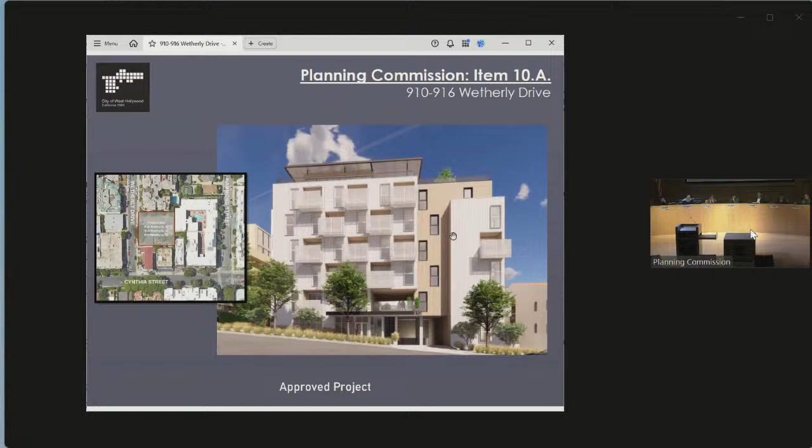Because this is 100% affordable housing, it is eligible for significant incentives and concessions in accordance with state density bonus laws and the West Hollywood Municipal Code. The original approval granted a density bonus allowing an additional 72 units and an additional 3 stories, or 33 feet in additional height, and a waiver of parking requirements. Although no parking is required, the applicant has provided 62 parking spaces on site. These incentives were previously approved and are not subject to this amendment or appeal.

As part of the original entitlement, the project was granted 4 concessions under the state density bonus law: one, elimination of the additional 6-foot setback for upper stories beyond the front yard; two, a reduction in common and private open space; three, flexibility in the location of common open space; and four, allowing non-residential parking for the adjacent church. Like the density bonus incentives, these concessions were previously approved and are not subject to this amendment or appeal.

The project was also approved with 3 modifications: two modifications for a 10%, or 1-foot, reduction to each side yard setback, and a 10%, or 1 foot 6 inches, reduction to the rear yard setback. These modification requirements live in Chapter 19.60 of the West Hollywood Municipal Code, where parameters are set on what constitutes a variance versus a modification. A modification is an adjustment of no more than 10% to the standards of the zoning code. Anything exceeding that 10% limitation requires a variance application.

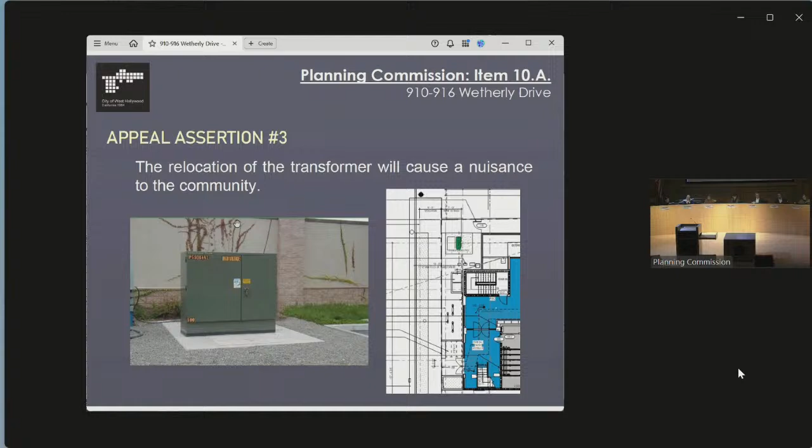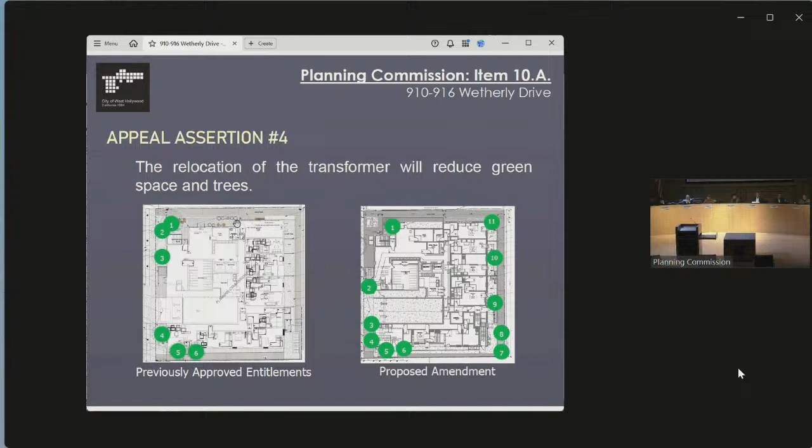The fifth appeal assertion claims that the removal of the green roof reduces environmental benefits and design quality. To clarify, the original project did not include a green roof that was publicly accessible or a landscape amenity space. The green roof was one of 3 options from the green building standards outlined in the West Hollywood Municipal Code. These options are a green roof, renewable energy systems, or solar thermal systems. The updated design will meet the city's green building requirements as conditioned in the original approval. If the applicant chooses not to pursue any of these 3 required options, the project will be required to return to the Planning Commission for further review.

The sixth appeal assertion raises concerns about the revised balcony design, claiming it reduces design quality. The amendment includes a net reduction from 47 to 45 balconies, along with adjustments to improve privacy and satisfy California Building Code requirements. Many balconies on the north and south sides were shifted or reduced, while others were relocated to the east and west, where greater setbacks offer more separation from the neighboring properties.

These changes were reviewed by the city urban designer, who confirmed that the architectural character, massing, and materials remain consistent with the approved design. The project continues to meet objective standards for private open space under the zoning code, and under the Housing Accountability Act, the city cannot deny or condition the project based on subjective aesthetic preferences when those objective standards are met. So in summary, the revised balcony layout improves functionality, maintains the approved design integrity, and remains fully code compliant.

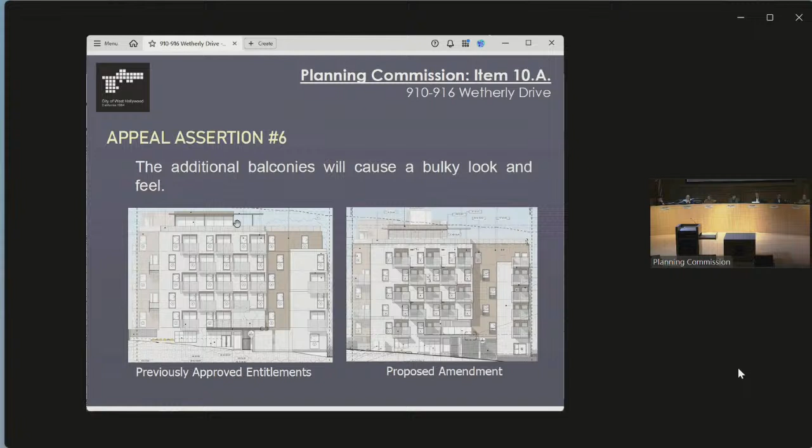The seventh appeal assertion objects to the removal of a 423 square foot fitness room. However, there is no requirement under the West Hollywood Municipal Code that mandates specific amenities like a fitness room. As a Housing Accountability Act project, the applicant has discretion over amenities allocation as long as the project meets all objective zoning and open space standards, which it does.

The fitness room was removed and replaced with a unit from the second floor to preserve all residential units and increase usable courtyard open space. Other amenities, including a community room, rooftop areas, and a dog run, remain available to the residents.

The eighth appeal assertion claims that the transformer location violates the city's seismic setback requirements. While this site is located in the Fault Precaution Zone 1, the 50-foot setback only applies to habitable structures, not equipment like a transformer. The transformer is compact, non-habitable, and will be installed on a concrete pad that complies with all seismic safety standards. Southern California Edison reviewed and approved the placement, confirming it meets safety and accessibility requirements. The location is necessary for utility access, and there's no violation of the city's seismic regulation.

Also, I wanted to confirm that the red line indicated in this photo here is not the fault line. However, it is a setback line indicating a distance of 50 feet away from the actual fault line.

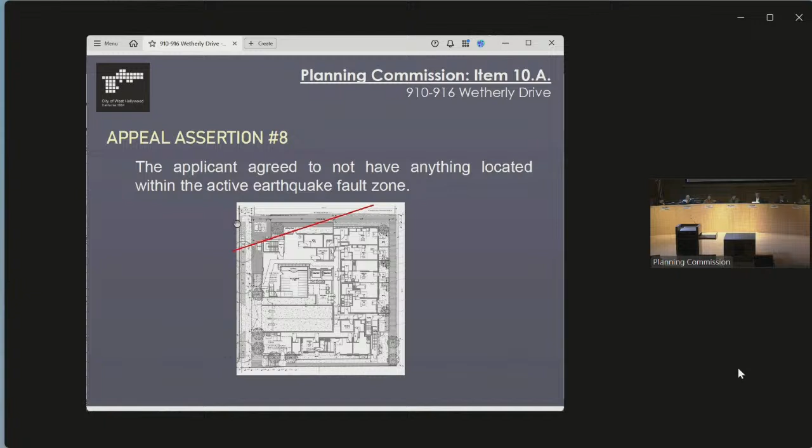The final appeal assertion questions the Planning Commission's consent calendar process at the February 2025 meeting. That process was conducted in accordance with standard procedures. The commission was informed on record that if there was any factual or objective questions, the item could be moved to the excluded consent calendar. Staff also clearly stated at the time that if the project were appealed, it would return to the commission as a notice public hearing, which is exactly what is happening now.

The city attorney and the planning commission staff ensured that all procedural requirements were followed and no irregularities were identified that would affect the validity of the approval. The hearing has been properly noticed and all interested parties have had the opportunity to participate. The appeal process has been fully honored and executed in accordance with the law.

So as a 100% affordable housing project, this development is subject to the Housing Accountability Act, or HAA. The HAA requires that cities give the fullest possible weight to the approval and provision of housing, especially for lower income households. The city of West Hollywood has a RHNA goal of 3,933 new units by 2029, and projects like this are critical to meeting that obligation.

Under state law, when a housing project complies with objective general plan and zoning standards, a local agency cannot deny it, reduce its density, or impose conditions unless it makes specific written findings, supported by substantial evidence, that the project would result in a significant, quantifiable, and unavoidable public health or safety impact, with no feasible way to mitigate that impact. In this case, the appellant did not assert that the project is ineligible under the HAA, nor did they identify any objective standards that the project fails to meet. As a result, the Planning Commission's discretion is limited, and the project must continue to be evaluated through the lens of the HAA protections.

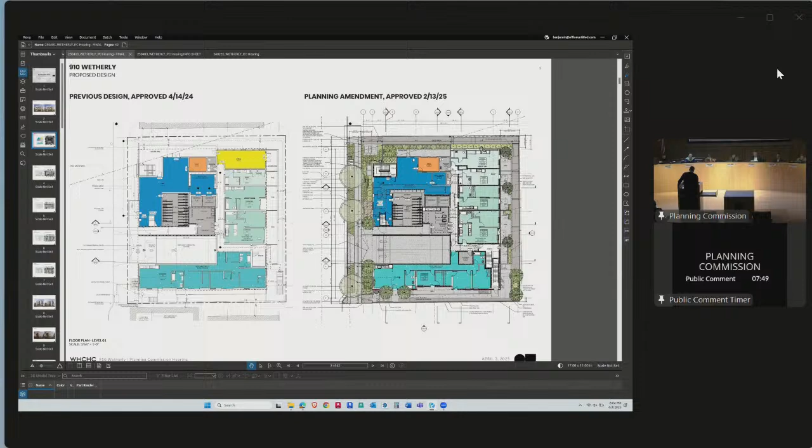From an elevation standpoint, you just saw the rendering of this. Again, largely untouched in terms of the main portion of the facade, with the addition of more balconies, but the same balcony condition, same design, same materiality and treatment.

The transformer is shown right here.

On the south side, this is one of the places where, to be clear, the building size in terms of gross square footage did increase, largely because where we could, we moved the depth of that balcony wall towards the plane of the image, or further south. So this becomes more of a Juliet balcony, which we felt, given the side yard setbacks versus the bigger front and rear setbacks, would benefit privacy, because you don't have somebody out on the balcony. The door is open, there is breeze, but you're not actually out there.

East side was an area where we took advantage of the opportunity to place a balcony almost completely outside of the exterior wall. It's still inset, so the language of where we treat balconies is preserved, but you're seeing addition of several balconies here that are deeper, larger, and more usable, again on the rear yard with a further setback. We felt that was more appropriate.

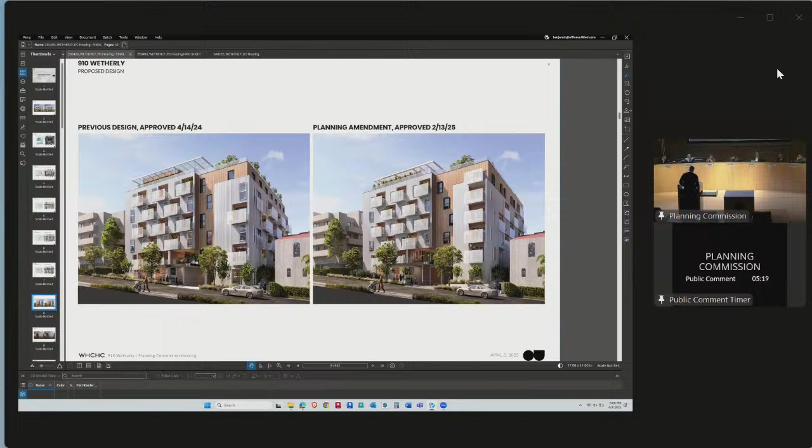We have some side-by-side views just showing what we believe to be very minor changes. You're seeing the shrinking of the balcony, so that becomes a Juliet condition, while these ones remain usable. Same thing here - the balconies in the diagrid formation remain in the deeper format, looking out over the street.

From above, we want to make a couple clarifications. The requirement for a green roof or alternate measures we will meet, and we are currently still including a green roof, as you can see here. That was never intended to be usable - it's in an area where you actually can't see it as a resident, but we still intend to provide it and meet the code requirement for size. Part of the reconfiguration was simply due to the amount of mechanical equipment we now have on the roof.

If I could just quickly address a couple things that came up: as staff mentioned, we are not aware of noise complaints about transformers, and we simply comply with Southern California Edison's standards for noise, vibration, and the footing that the transformer sits on.

The green space - there was actually no loss of common outdoor space. In fact, at the courtyard level, by moving one of the units, we are increasing the amount of usable outdoor space. Again, a trade-off to be considered with changing the gym use, but we felt more common outdoor space was a value.

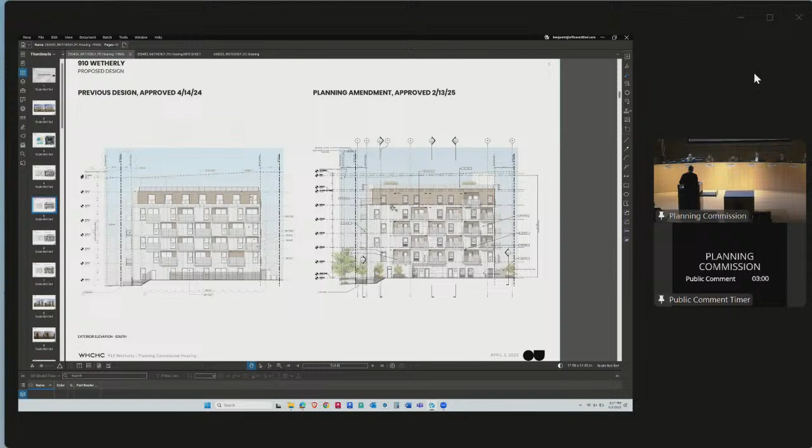That's largely a result of the input, coordination, and decision-making from ownership about mechanical systems that impacts the floor-to-floor heights or the usable floor-to-ceiling heights. This is a 100% affordable project, and the selection of MEP was made to service the most units possible. So we made some minor additions to the overall height, still within the zoning clearances and well within the 10% adjustment in terms of height. So if you're noticing a slight difference in terms of this to this, that's the result of it.

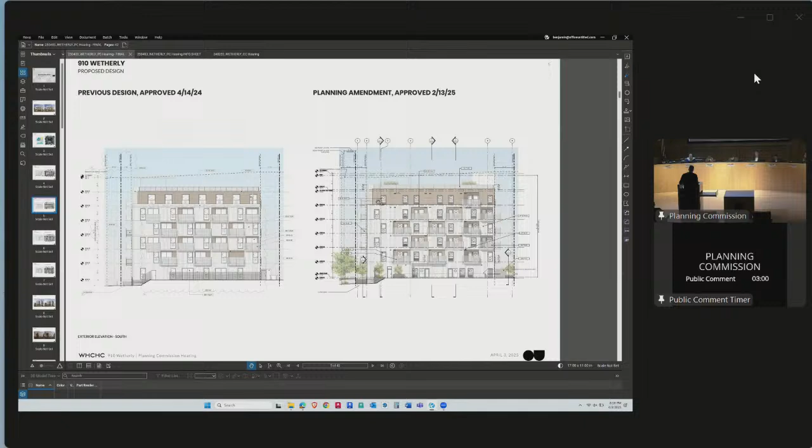And what is that height? How many feet of additional height? It's approximately 2 feet. Okay, thank you, let's move to the next one.

So now we are at the west elevation, correct? East. East, okay, sorry. So now we're looking at the stairwell? You have the stairwell on the left.

Correct. Can you explain, did the CBC change since this original design, so that stairwells didn't have to be enclosed before and now they do? The CBC did not change. To answer your question, this was more of a long-term operational concern. Initially, we wanted to preserve as many views as possible and, to the greatest extent, be a good neighbor in terms of where we are placing mass at the top. The entire top floor of this building has been set back wherever possible. We are providing significant outdoor common amenities, but in this case, this was a long-term durability, operational, and safety decision.

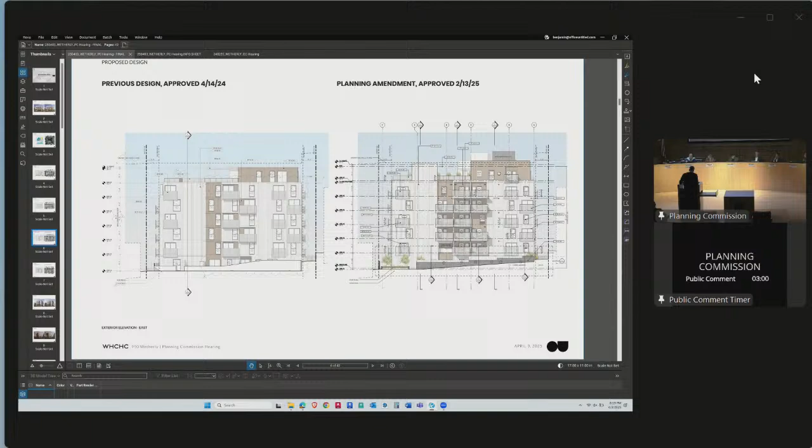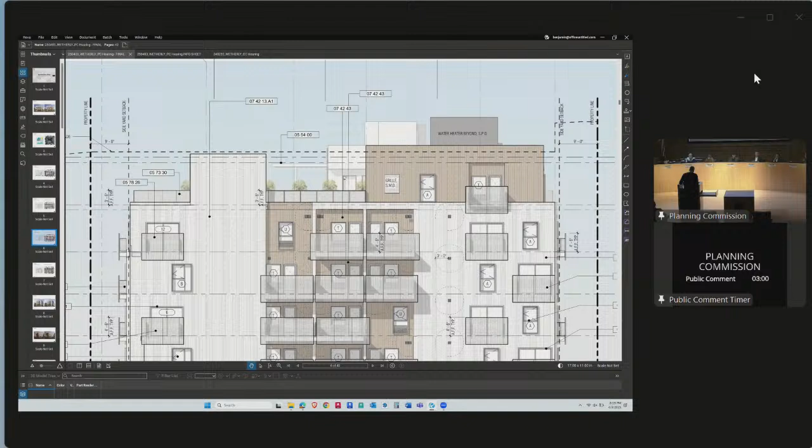Okay, so moving to the right, how much taller is that section now? We've added—there's a baseline 3.5 foot high parapet, which is the code minimum for fall protection. This is the elevator overrun you're seeing. This is a parapet as well, just treated differently from a material standpoint based on the architectural language in the rear. And everything above that is screened mechanical.

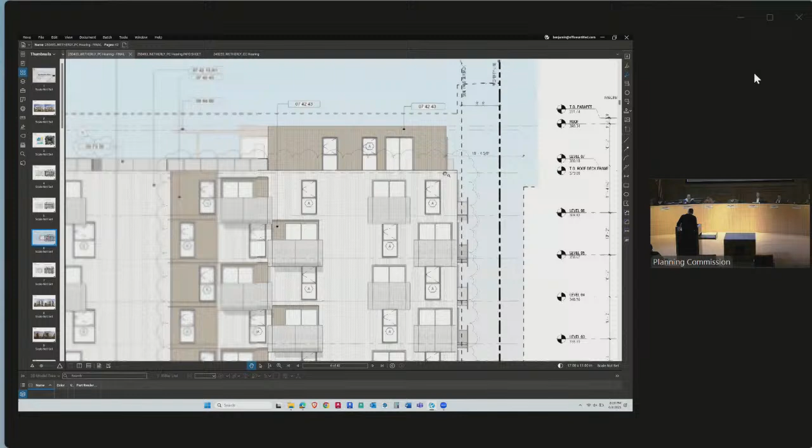No, I'm referring to what I'll call the tan section—how much taller is that than it was in the original approved plans? 1.4 feet. Okay, thank you.

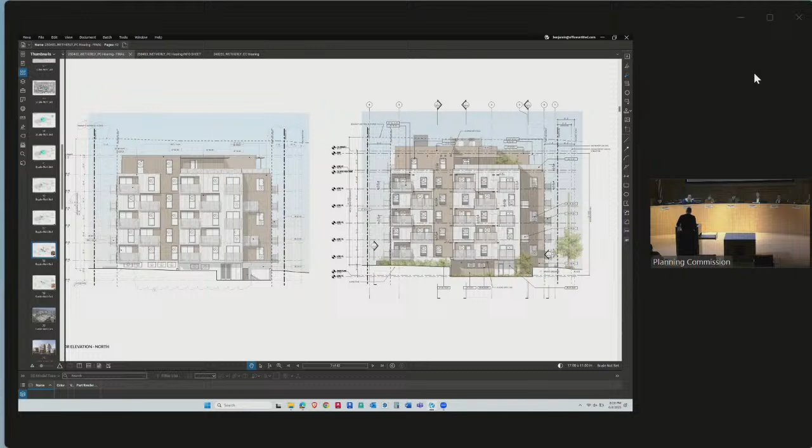Let's talk about the swinging balcony doors. What is the benefit of removing a sliding door and adding a swinging door, especially in light of now smaller balconies? That's a good question. Ultimately, certainly in the case of the deeper balconies as you see here, it's an accessibility concern—the threshold that sliding doors require is a slightly higher lip to cross over. So one of the reasons we made that decision was for greater accessibility into and out of the balcony.

We get this question a lot, about whether a swing door or sliding door impacts what you can place on a balcony. Ultimately you still need to step out onto the balcony, so the chance you'd have a chair right where the swing would be—we've just never run into that professionally. So we don't really see a net drag in terms of usability of the balcony with a swing door. It was a mix of functionality through an accessibility lens, longer-term maintenance, and what we've found doing a lot of multifamily and affordable housing projects, which is that largely that space is not necessarily missed. One more point: in other places we have individual air conditioning units within each room. That's a cost decision, but also an efficiency decision, and that precludes the use of sliders in the Juliet condition.

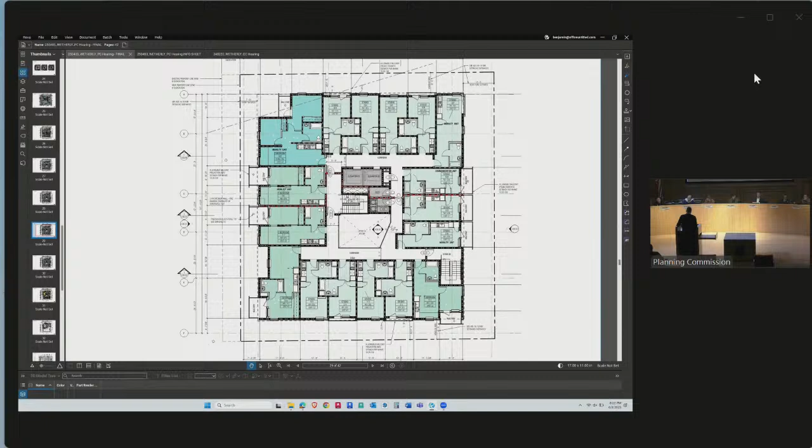Okay, thank you. Can you explain why you've removed opening windows and changed them to fixed windows? That has to do with the final selection of the HVAC system and how we're servicing the entire building. The building code requires a certain amount of clearance for an operable window near intake or exhaust manifolds, so in some cases we had to fix that window based on its proximity to where the mechanical was coming out of the building. So I'm trying to figure out how that works in our climate change plan.

How are the fiberglass windows more environmentally friendly than the aluminum? Twofold. One is the energy transmission of aluminum, the conductivity. Fiberglass is a more insulative material. This building isn't seeking LEED certification, but for those types of certifications, using aluminum in windows makes it very difficult to achieve.

Different metrics. But I guess my question is also about maintenance, about the longevity of fiberglass versus aluminum. We have not had any maintenance issues. Okay, thank you.

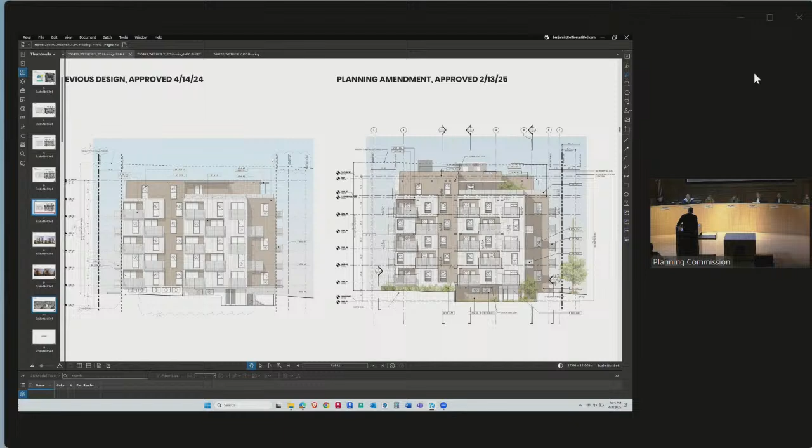You made a statement about the green roof, and it sounded like you're not eliminating it, but the plans show that you are eliminating it. Can you clarify that? The plans show that we were still going to meet the requirement, whether it was the green roof or the two alternative options. We're still trying to make final decisions, but as you can see in the rendering, the green roof actually makes it easier to meet the codes versus going for solar or solar hot water systems, which require significant access buffers around them. Given that the roof area, as a result of making the top floor an amenity floor for residents, is much smaller, we didn't feel it made sense to dedicate that area to solar PV or hot water, where most of it would get eaten up with just access, so you'd really end up with nothing.

Because there's a statement in the staff report that it was removed because of maintenance challenges. So we are keeping it. So you are keeping it? Because that's not what's in the resolution? Is it, because it's in the staff report, it says it's being removed.

Yeah, so that was the scope of work that we received at the time when I did the amendment. The code requires that they meet the green building requirements anyways. So if they choose to continue with the green roof, they're still in compliance with the resolution, which says that they just have to select.

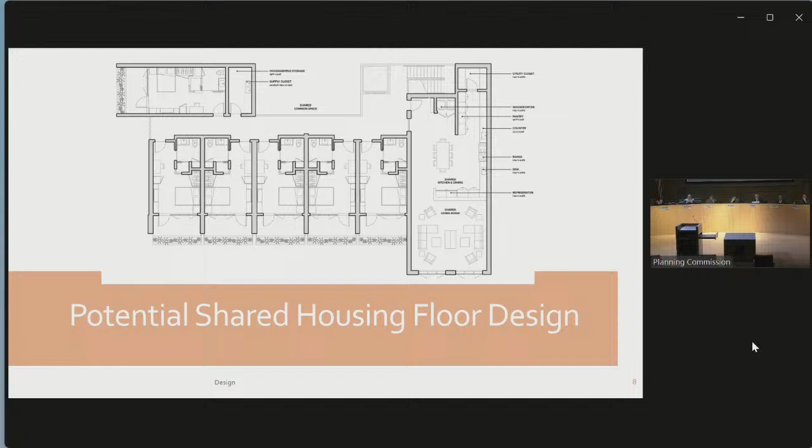Shared housing will generally be allowed where multifamily is currently allowed today. So shared housing developments would have to comply with existing multifamily standards for open space and design.

The communal spaces would be required to be properly maintained by the building owners, and there would be an operations and management plan required to be submitted to the community development director as part of the development application. Additionally, state law requires that buildings with 16 or more units have on-site 24-hour management.

Shared housing units would be required to be accessible directly from the common kitchen, dining, or living areas that they share, and they cannot have a separate external entrance. We also have minimum square footage dedicated to each unit within the shared common spaces.

There are additional minimum kitchen standards required based on the number of shared housing units as well, to be provided within those common kitchen spaces.

Open space would be required to be provided, similar to the requirement for micro units, so 70 square feet per unit for private open space.

There are additional requirements for storage, both within the unit itself for closet storage, as well as outside of the unit for utility storage and a cleaning supply room. And then, as with the current existing multifamily standards, laundry facilities are required to be either provided in unit or one washer and dryer per 12 units within the building.